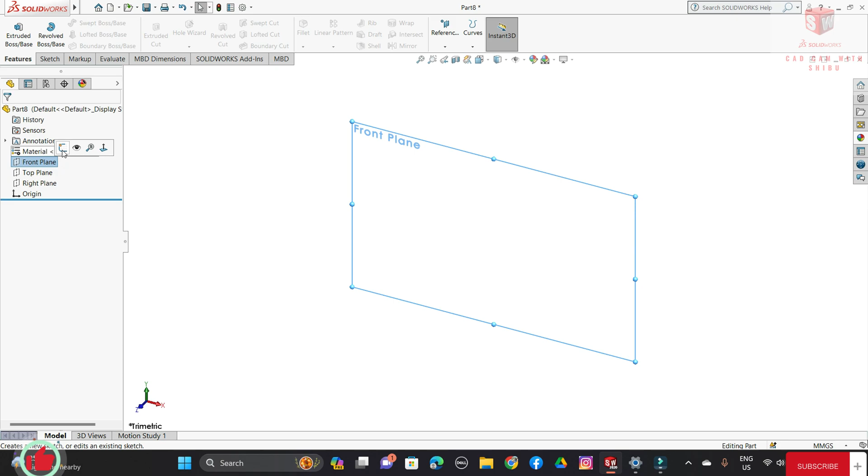Today we will make one shaft with multiple keyways. So let's start. First, select the front plane, sketch, then select the line, make the sketch. Okay. Then we will give the dimension.

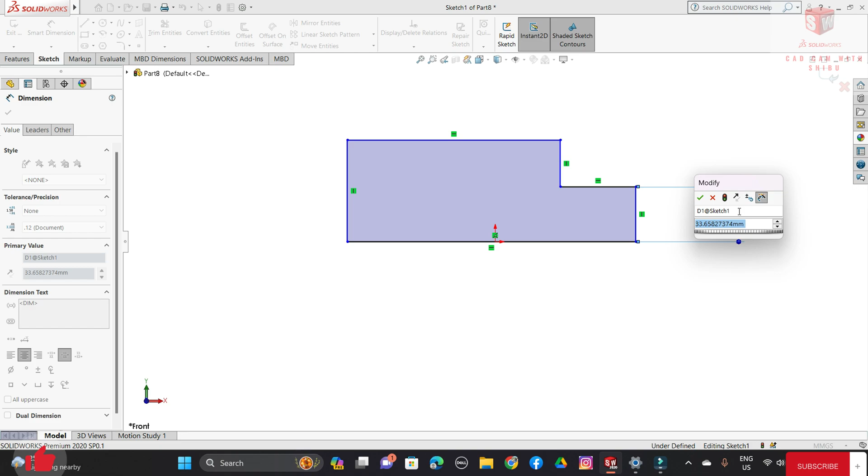Here we will keep 12 mm. Here we will keep 15 mm. Length we will make 500. Okay. Let's make 250. Okay.

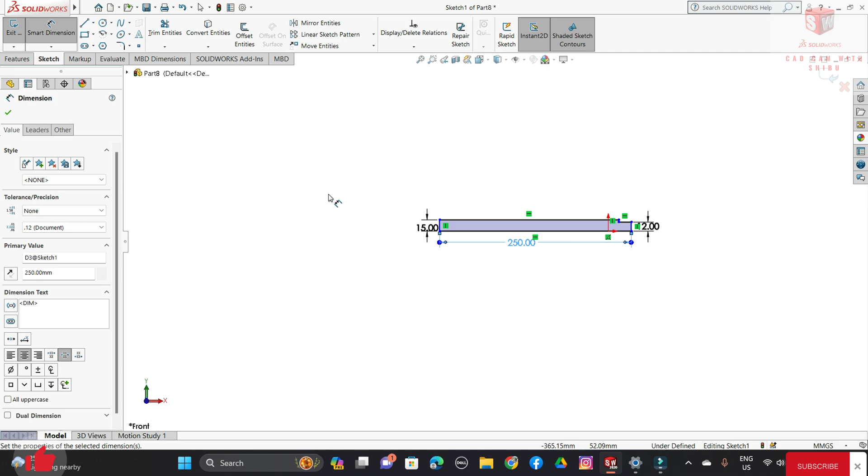Now, go to feature, revolved boss/base, select this line. Okay. Now our shaft is ready. Now we will cut the keyway. For the keyway, select front plane, go to reference geometry, select plane.

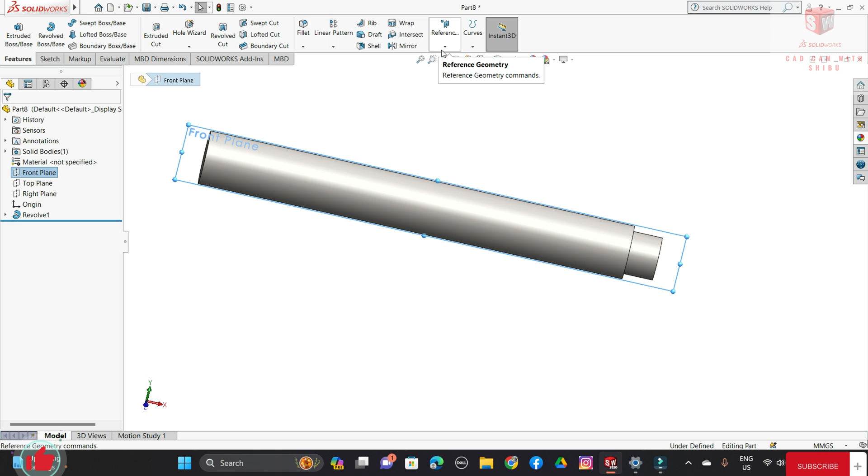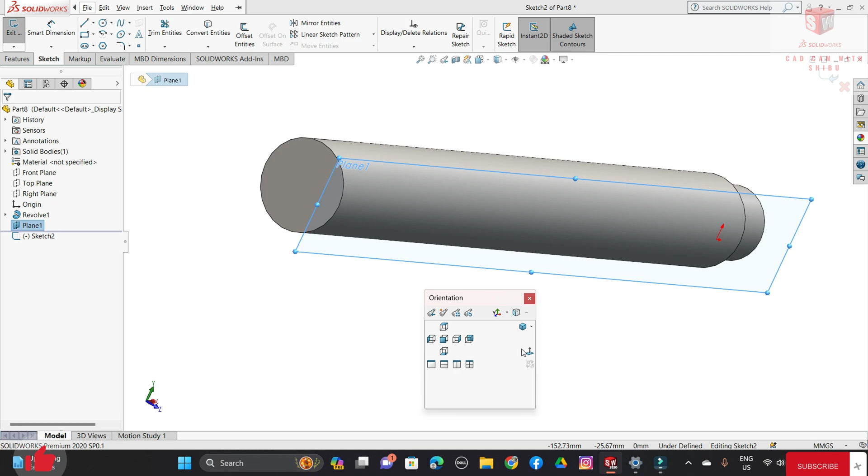So our shaft diameter is 30 mm. So here we will select 15. You can see. Okay. Select Plane1, sketch, normal. For the keyway, first select the center line. With the center line, okay.

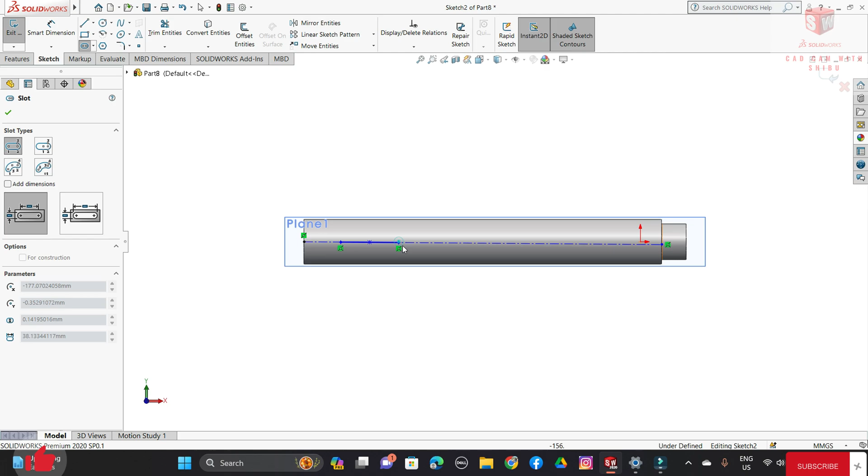Select this. Then make the keyway. Okay. Then we will give the dimension. Select the smart dimension. Eight. So length we will keep 25. Okay.

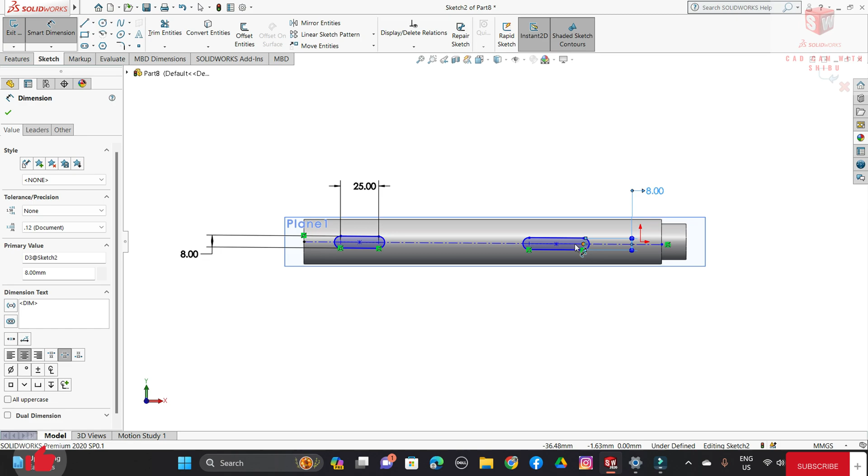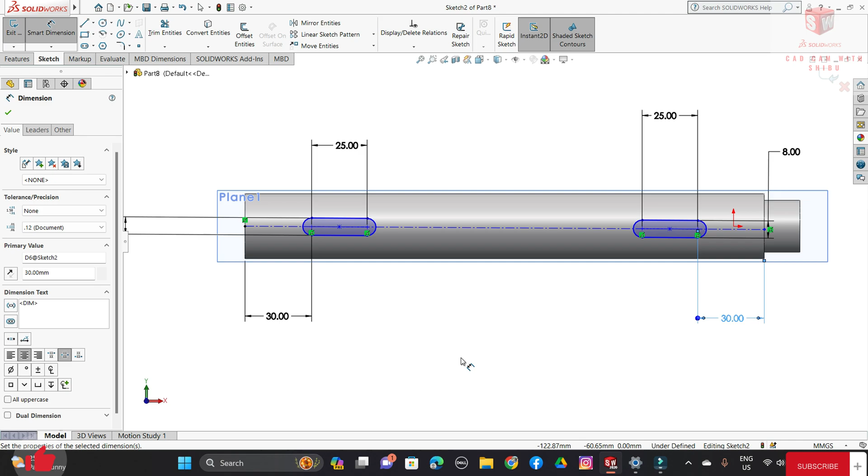Make 8 mm. Okay. 25. From here also 30. So for the keyway, our sketch is ready. Now we'll cut the keyway.

Go to feature, extrude cut. So here we'll select 4 mm. Okay. So now you can see our keyway is cut. Let's hide this one. Okay.

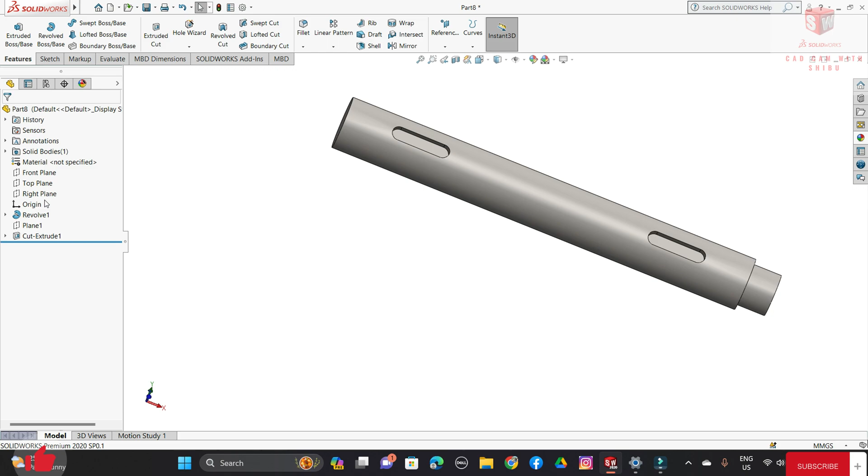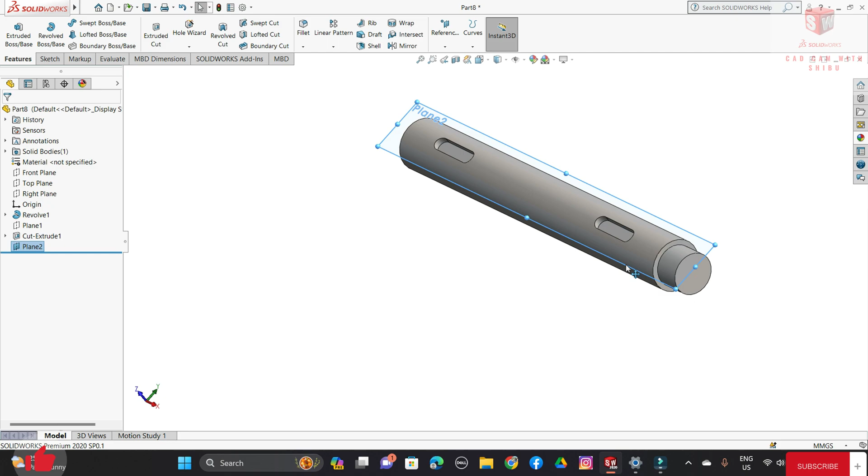So we have to cut one keyway here also. So for that, select front plane, go to reference geometry, select plane. So this side our shaft diameter is 24. So here we will keep 12 mm. Okay. Select this front plane, sketch, normal.

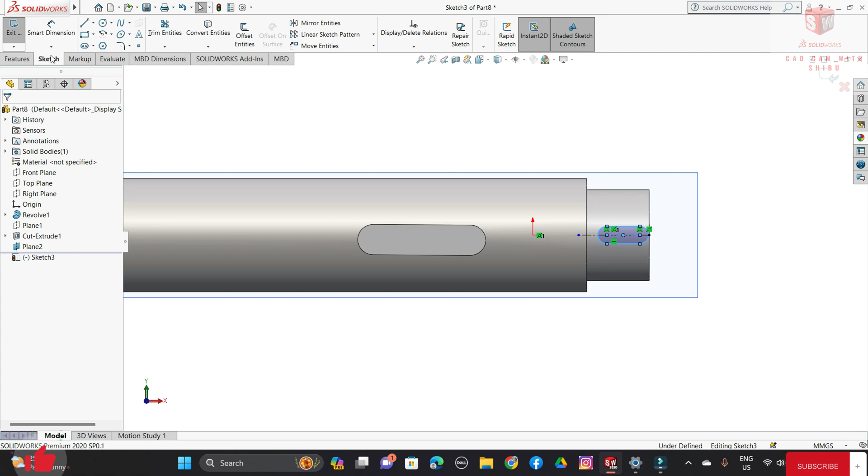Again we have to select center line, make center line in here. Okay. Select the keyway. Okay. Give the dimension, 3 mm. Eight mm. Here we'll make 4 mm.

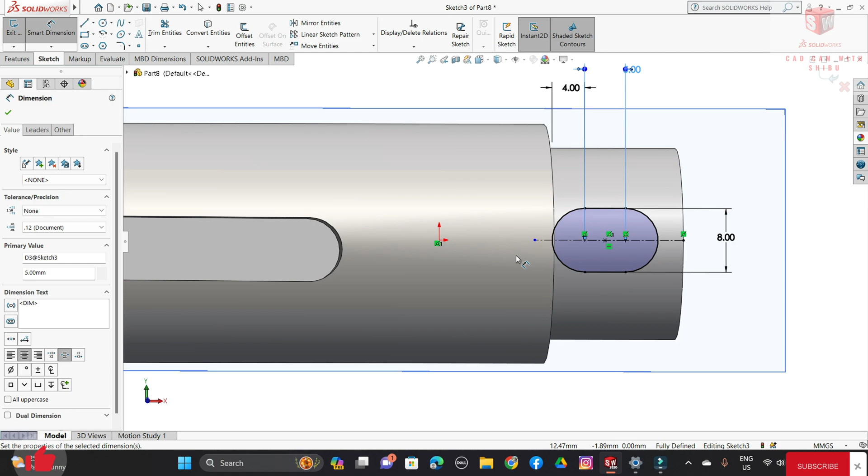5. Okay, go to feature, extrude cut. Okay, so hide this one also. So our shaft is ready.

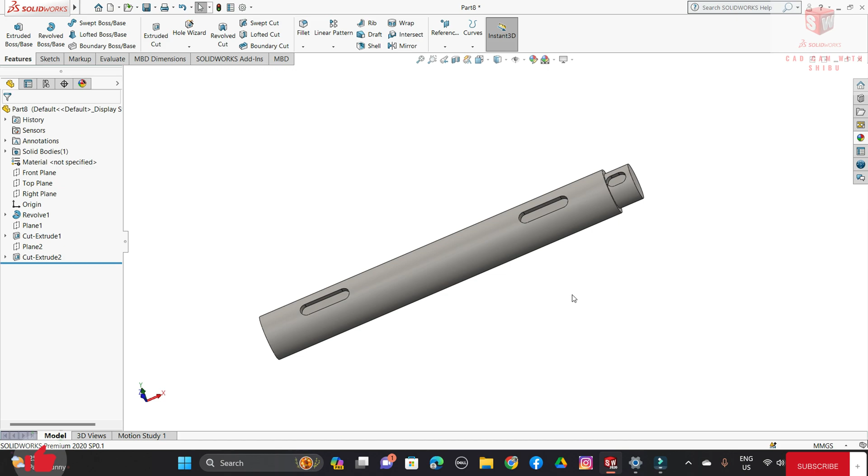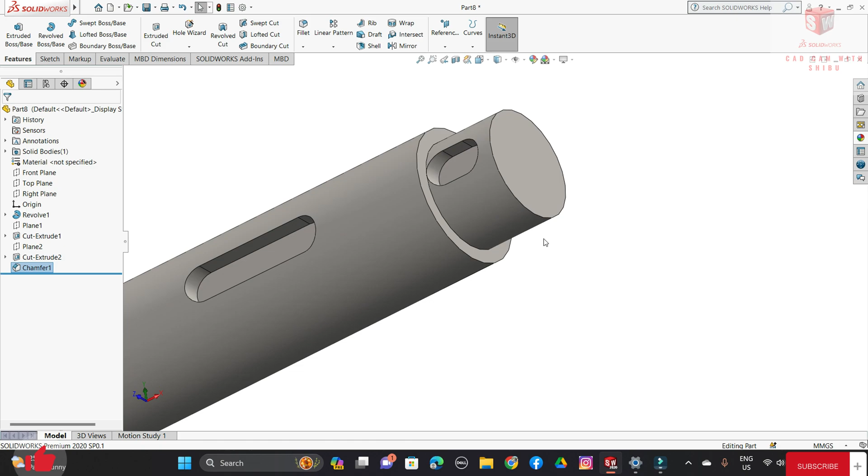Now cut the chamfer. For the chamfers, go to chamfer, select this edge, 2 mm. Now let's make 1.1 mm. Okay, select this edge, chamfer, 1 mm. Okay, this face, chamfer, we'll put 0.5. Okay, so our shaft is ready.